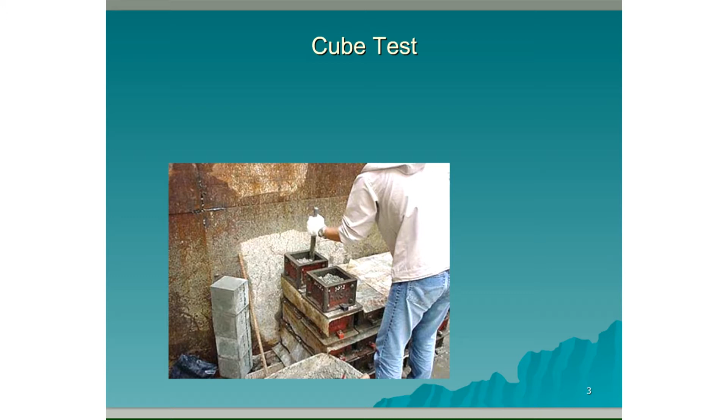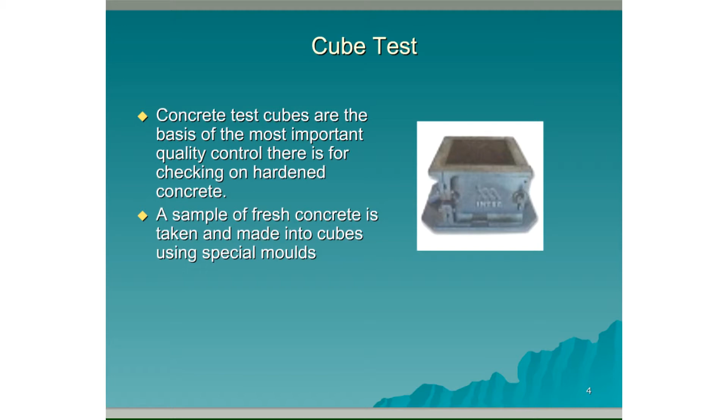Cube test. The purpose of the cube test is to determine the compressive strength of concrete. Concrete test cubes are the basis of the most important quality control there is for checking on hardened concrete. A sample of fresh concrete is taken and made into cubes using special moulds. These are laboratory tested to determine the compressive strength of the concrete.

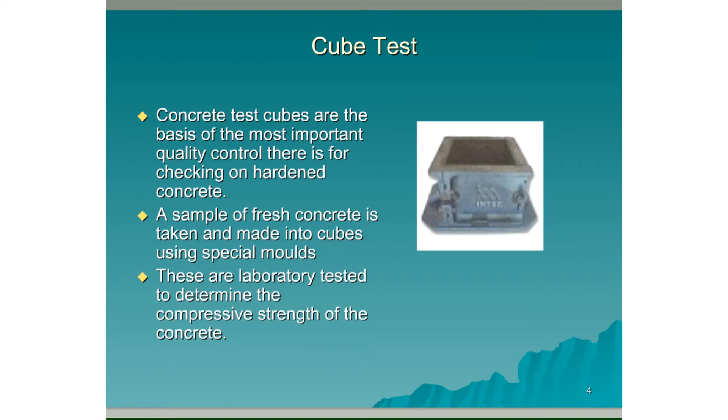The tools required to carry out a cube test. One is the cube mould itself. These normally have base plates on them and are 150 millimeters. Two are the spanners for putting together and taking the mould apart. 3 is mould oil. This is to allow the concrete or stop the concrete from sticking to the edge of the mould.

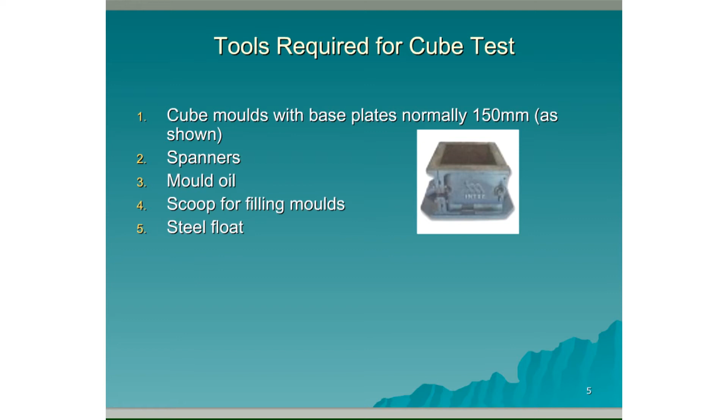4 is a scoop for filling the moulds. 5 is a steel float for smoothing off the top of the concrete. 6 is a compacting bar for compacting the concrete into the cube mould. It usually weighs 1.8 kilograms, 380 millimeters long, with a ramming face of 25 millimeters square.

7 is a damp sack. This is used to help cure the concrete in the mould and protect it. We need polythene sheeting for underneath and over the moulds for protecting them. 9 is a waterproof crayon or marker, so you can write the serial number on the side of the concrete cube. And 10 is a water tank, which the cubes are submerged in order to cure them.

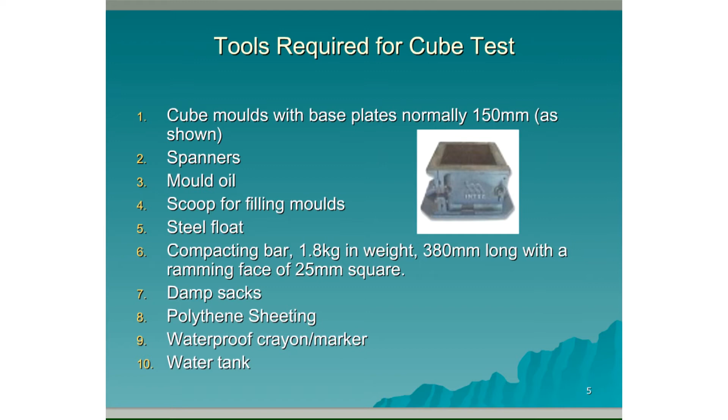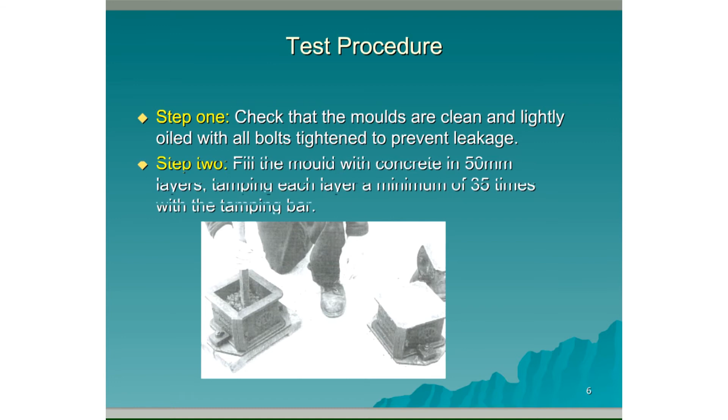The test procedure. Step 1. Check that the moulds are clean and lightly oiled, with all bolts tightened to prevent leakage. Step 2. Fill the mould with concrete in 50 mm layers, tamping each layer a minimum of 35 times with the tamping bar.

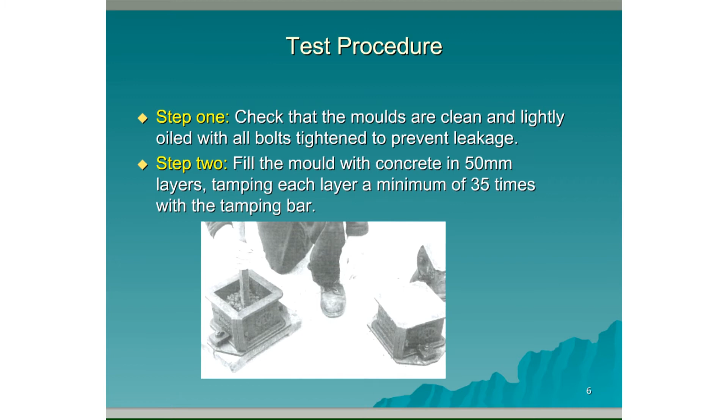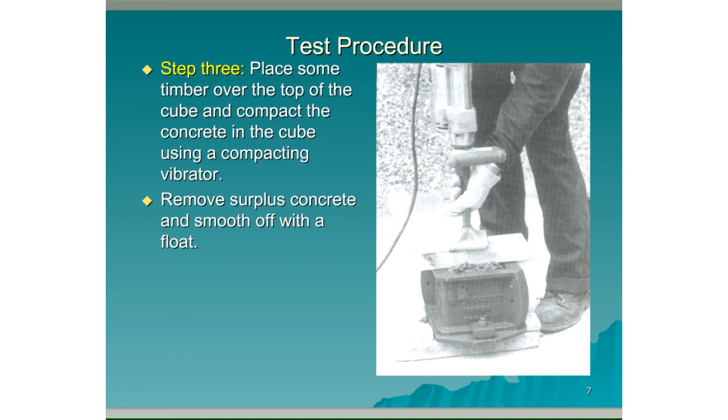Step 3. Place some timber over the top of the cube and compact the concrete in the cube using a compacting vibrator. Remove the surplus concrete from the top and smooth off with a float. Wipe the mould edges clean and number them for identification purposes.

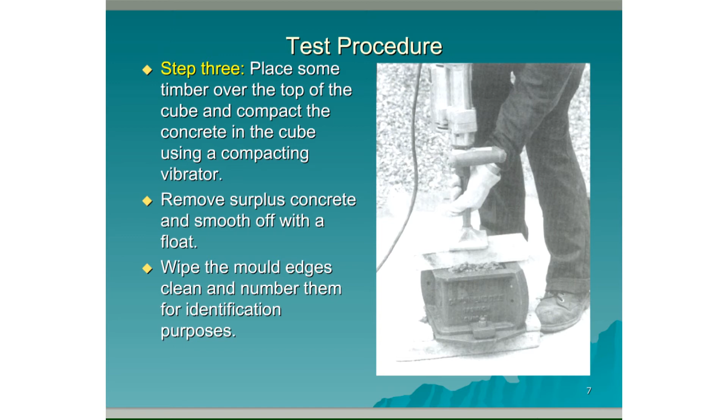Step 4. Cover each mould with a damp sack and store inside at normal room temperature, 15 to 25 degrees Celsius. Protect the samples at all times from high and low temperatures, especially frost and drying winds.

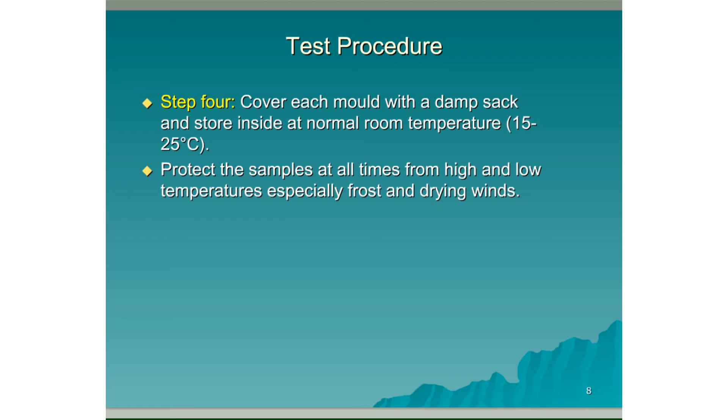Step 5. Stripping the cubes. Loosen all nuts, tap the sides gently and lift off carefully. Number the cubes on 2 sides. After the storage period, the cubes need to be water cured in a thermostatically controlled water tank of between 18 and 20 degrees Celsius before being sent to the laboratory for testing.

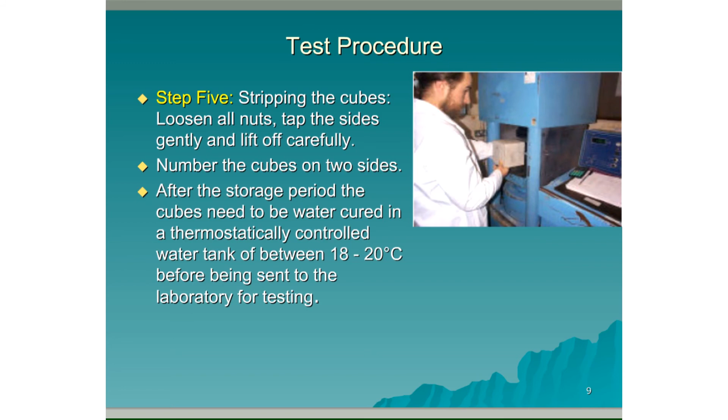The cube test. Below are some samples of concrete cubes after being tested for their compressive strength at the laboratory.

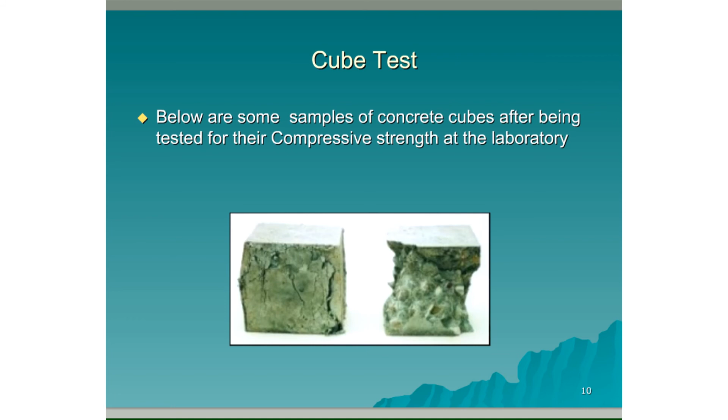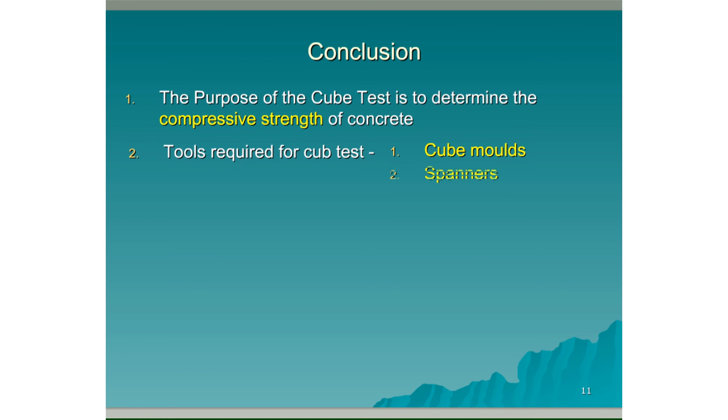The purpose of the cube test is to determine the compressive strength of concrete. The tools that are required to carry out a cube test are: 1. The cube moulds, 2. The spanners, 3. Mould oil, 4. The scoop, 5. The steel float, 6. A compacting bar, 7. Some damp sacks, 8. Polythene sheeting, 9. Waterproof crayon or marker, and 10. A water tank.

The cube test. 5 steps to carrying out the cube test are: 1. Check the moulds, 2. Fill the mould, 3. Compact and clean the mould, 4. Cover and store, 5. Strike the mould and cure it before the cube is ready to be tested.